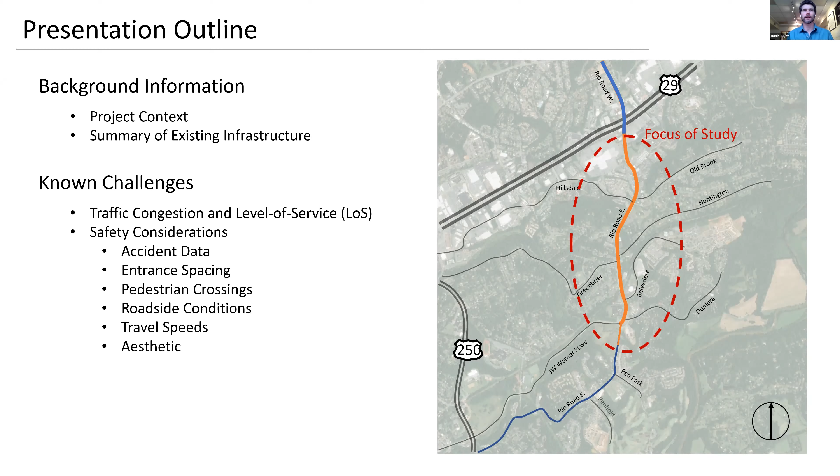So what we're going to do to start is work our way down the corridor, starting close to the Fashion Square Mall or Route 29, and back our way down as we get closer to Pen Park. We're going to look at some aerial photographs together and explain some simple observations we've been able to make as we work through the corridor.

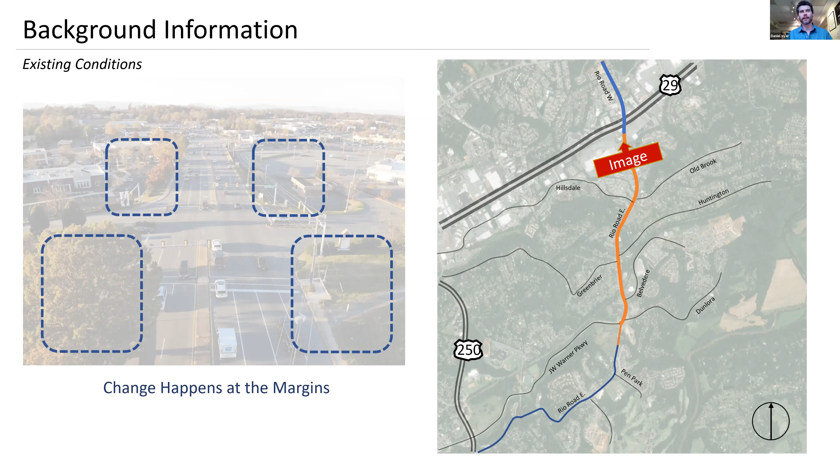As you listen and look at these photographs, I'd like to encourage you to pay attention to what's happening at the margins of the road, or next time you drive the corridor, to pay attention to what's happening at the margins. These are often our best cues for how the corridor should respond to the built environment, or for the built environment to be planned in a forward-looking way to be adjacent to the corridor in a healthy and responsible way for all users. Like all good social movements, change happens at the margins. So that's where we're going to start as we work down the corridor.

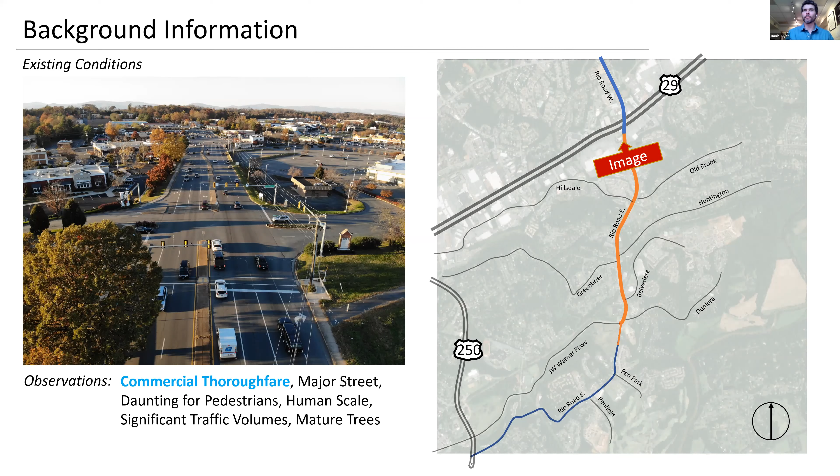Not surprisingly, here near the Fashion Square Mall and Albemarle Square Shopping Center, this is very much a commercial thoroughfare. It's a large street with a lot of throughput of vehicles. As a result, it's currently very daunting for pedestrians, largely lacking a human scale or a public realm for pedestrians to feel like they should be there. But there's also some mature landscaping and mature trees that are a great asset to the corridor, both from an environmental stewardship standpoint, but also just creating interest and visual barriers for vehicles to be aware of, like a constrained corridor. So there's good as well as challenging elements.

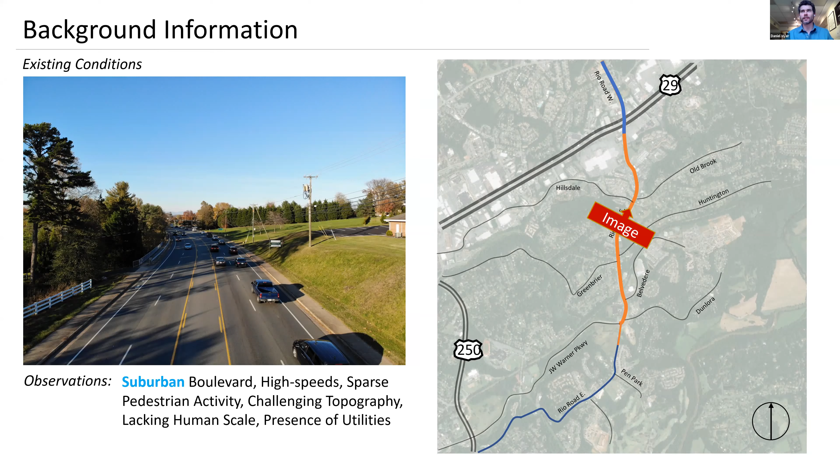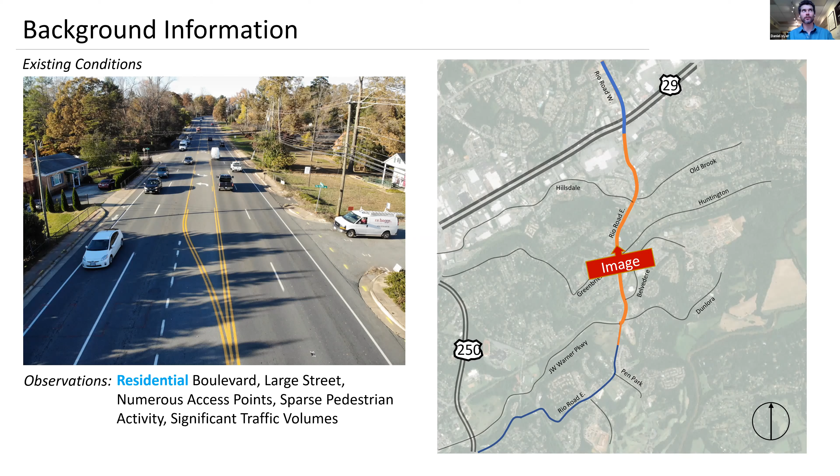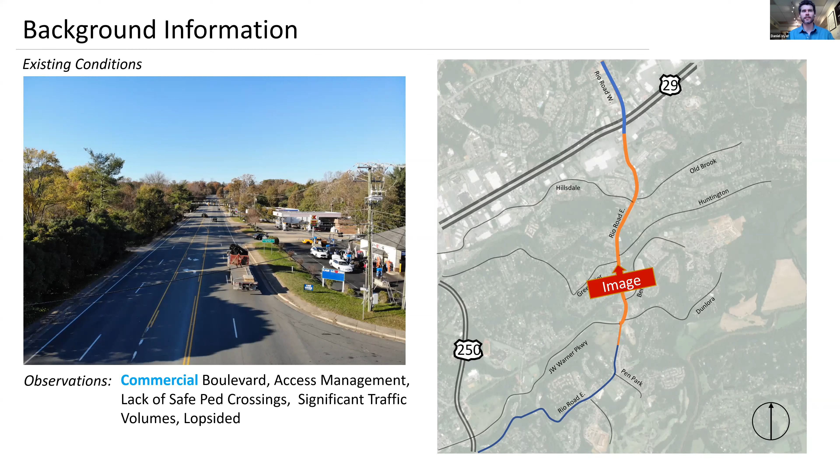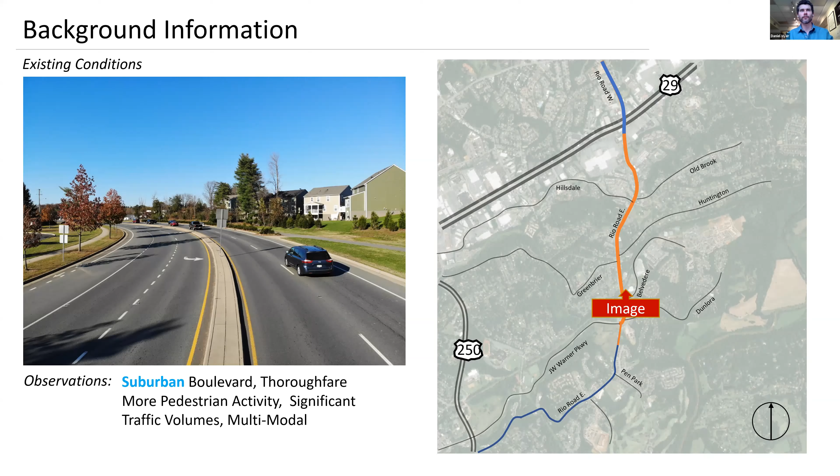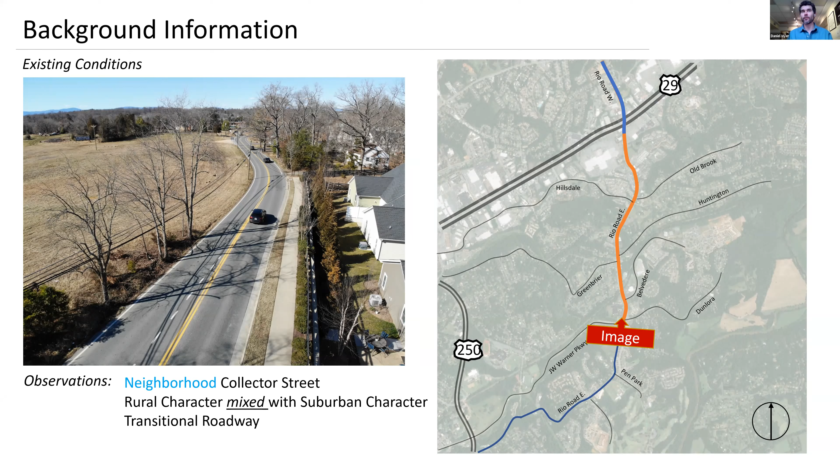It's transitioning itself from kind of a vintage or antiquated use to more of a modern use. And it's also a transitional corridor in that you're leaving the city and getting into the county. Here before long, you'll be on a 4-lane portion of Rio Road.

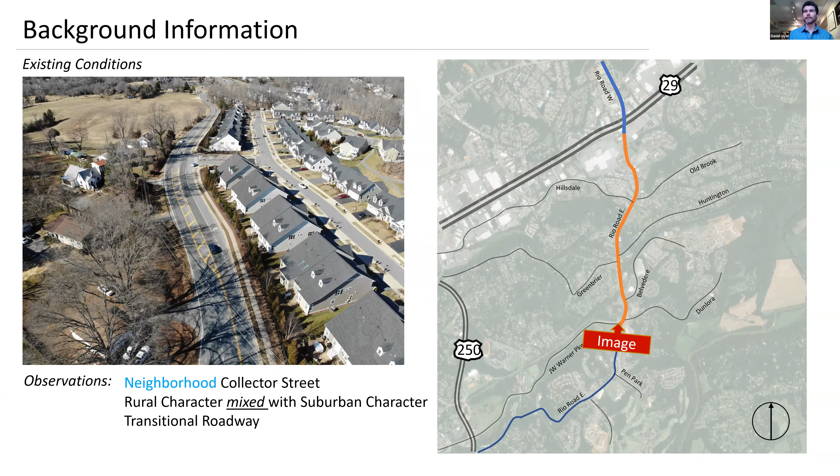And finally, our final existing conditions slide is more of the same. It kind of shows old on the left and new on the right, symbolizing this mixed corridor with different character traits. So we are both responding to what's on the current margins of the road, but also being aware of what is coming so that we can guide design and development decisions to keep this corridor cohesive.

You may or may not have known that this corridor is home to at least 13 transit stops. They're not easy to identify, even if you're walking along the corridor. This image on the left highlights a bus stop directly adjacent to Greenbrier Drive.

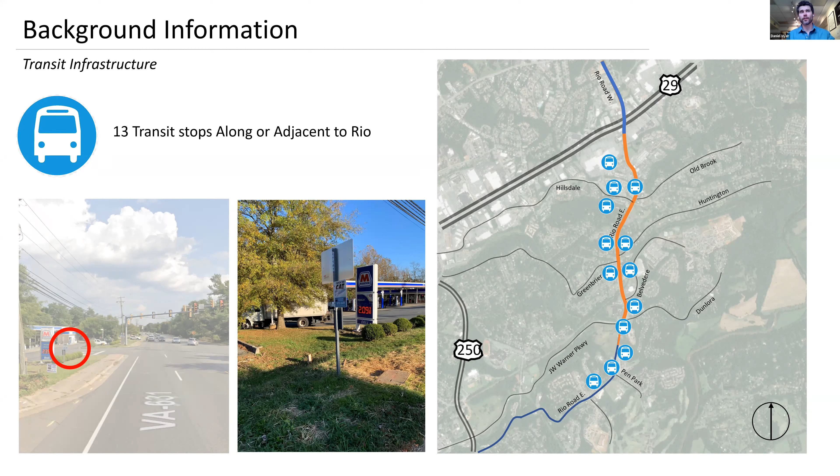I knew that a bus stop was there. I was trying to find the bus stop that was there, and I had a hard time finding it. That's kind of the nature of transit stops along this corridor. That's certainly something we want to be paying attention to, because it could be an interesting opportunity for creating traffic calming along the corridor, but also creating ridership growth for the transit service.

The corridor is home to numerous intersections of various size and complexity. There are 7 signalized intersections, meaning they have a signal with red, yellow, and green. There are also unsignalized intersections that pose different challenges, whether it's making a left-hand turn from Belvedere onto Rio, or trying to turn right into Huntington and almost getting rear-ended. So there's a number of different challenges depending on the context or typology of these intersections, and there are a number of them along the corridor.

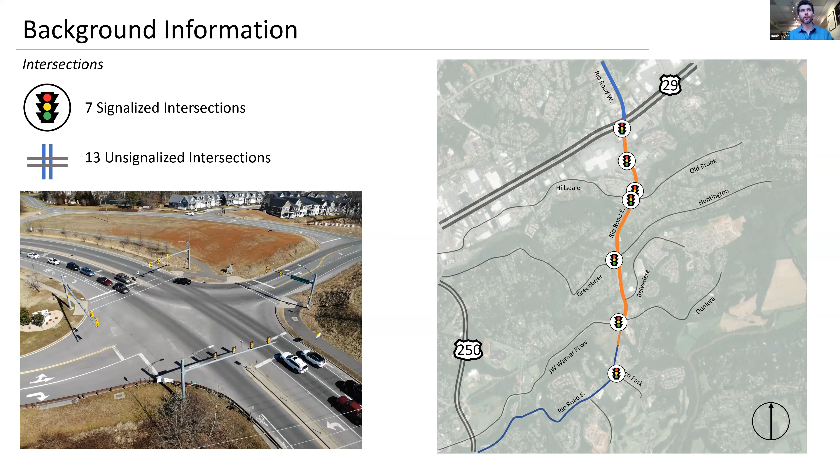The corridor does have bike provisions. That box is checked. Now, whether you feel safe in the bike lane or whether you actually want to use it might be a different story. But really, from John Warner Parkway all the way across 29, there is a dedicated bike lane.

But as you can see from the 2 images, based on how that bike lane is sandwiched in between the sidewalk and a gutter pan and narrow driving lanes, this bus is having a hard time making the turn and staying within its lane, encroaching into that bike lane. I have ridden my bike down this corridor, and it is a little nerve-wracking. It's definitely not for the faint of heart.

So even though those bike lanes are there, they might not be meeting the demand of folks who actually want to bike ride along the corridor, because it feels cramped and a little unsafe.

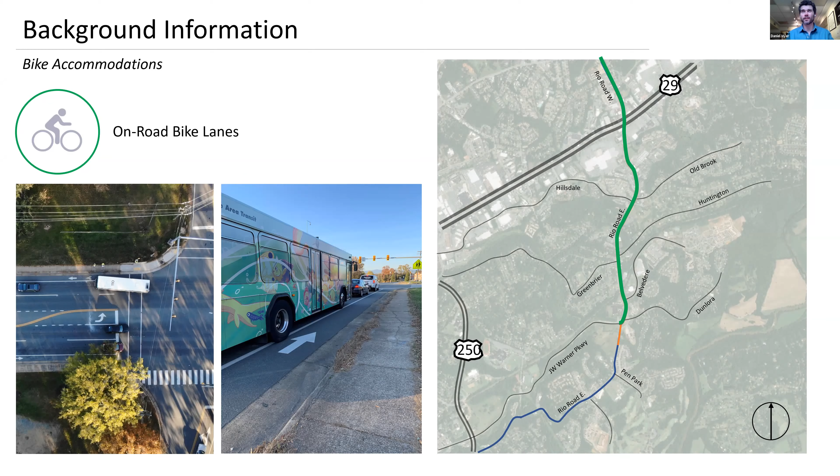Sidewalks. Again, there are sidewalks along most of the corridor. And again, you probably don't feel safe walking on them. Or if you did feel safe, you might get confused sometimes about where to go.

Here's an intersection in the photograph on the bottom left-hand side of your screen. If you were walking along the sidewalk and wanted to cross over to the gas station to get a sandwich, you might not exactly know how you're supposed to cross. It's not really predictable what a pedestrian might expect to see when looking to cross the roadway. I'm certainly not familiar with triangular crossing patterns, and it would leave me a little confused myself. So what you end up doing is jaywalking, and of course, that's always a good decision.

And if you are walking down the sidewalk pushing a stroller, well, you're going to hit some bumps in the road with vegetation growth and just a general lack of maintenance. So we're looking to make that a little more amenable for folks who actually do want to walk and feel safe.

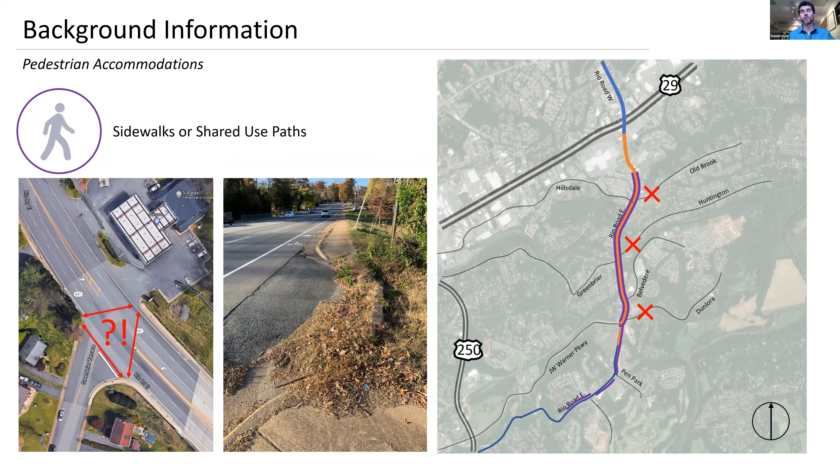It's worth stating that even if you did want to walk along the corridor, even getting to the corridor as a pedestrian could be challenging, because a number of the feeder streets coming into Rio Road don't have sidewalks either. So again, looking at those small and larger pictures here, we want to see people walking. We want them to have a place to walk to, and we want them to feel safe. But even getting them to the corridor should be considered.

A little bit of background information on why pedestrians may or may not feel safe, and what we can be thinking about as a design team going into this. Obviously, with travel speeds along the corridor being at least 35 to 40 miles an hour in most places, should there be an accident between a pedestrian and a vehicle, it would probably not leave the pedestrian in good shape, or alive, just based on statistics and speed data.

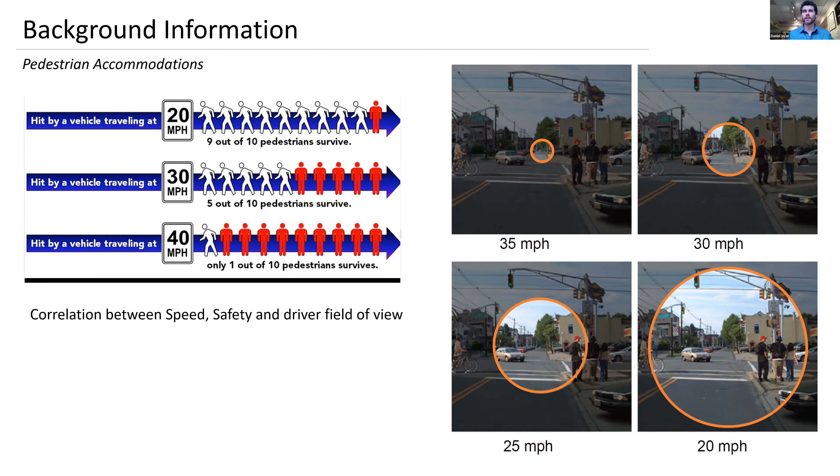So creating some space for pedestrians to be buffered or protected from drivers will be important. And also for drivers, you can't really blame them. The faster their cars are going, the smaller their field of vision is, because they're looking further down the road. That's what these images on the right-hand side of the screen try to indicate. As we're thinking through how drivers, pedestrians, and bicyclists interact, these are certainly things for us to be thinking through as we're proposing design solutions.

Most of you probably know, or are at least a little aware, about the number of studies that have happened in the vicinity of the project. And that's really why we are here talking about this right now. There's been the Rio 29 Small Area Plan, which had a traffic component, all the way down to studying roundabouts along Rio Road, and private development along the corridor.

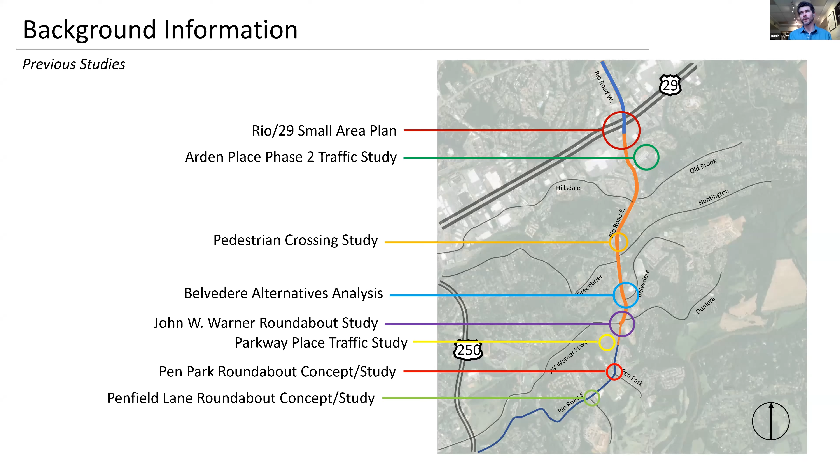There's been so many people who have looked at the traffic counts, the traffic volumes, and the turning movements along this corridor, but to date it has not been done in a cohesive and unified manner. And that's why we're here. We're here to evaluate all that has been done and bring the pieces together to create a corridor that responds accordingly to the numerous users, developments, and people passing through, looking at both current conditions and future conditions, and try to wrap it all into one cohesive and unified design understanding to guide future development and funding opportunities for projects the county might decide to proceed with.

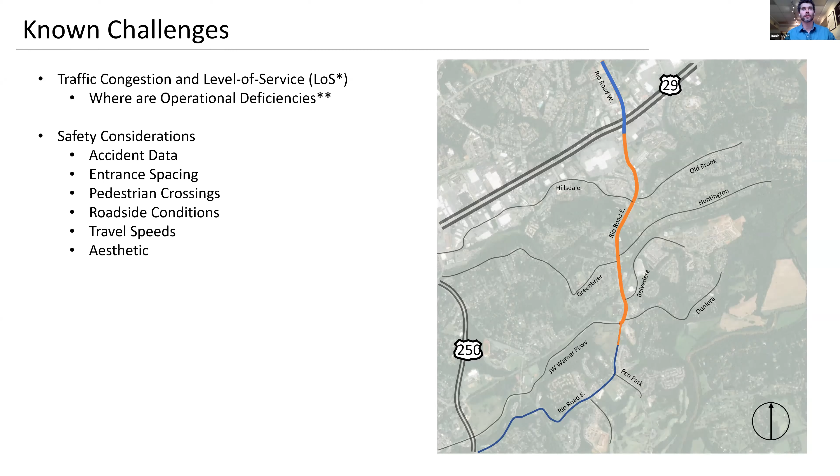So this will be good. Stepping back for just a moment to at least introduce a few definitions so that the rest of the talk makes a little more sense. What do we mean by level of service? This is sort of a common term in traffic engineering. And really what it is, it's a comparison of volume to capacity.

A roadway was designed to handle a certain capacity, or an intersection was, and what is the volume that it needs to carry? And so all of us have experienced the levels of service all the way from A to F. A good correlator is your blood pressure, or if you're having to explain to your children why you just used that word—that's more of a level of service thing.

And what do we mean by operational deficiencies? Operational deficiencies are some component of the corridor, or multiple components of the corridor, not operating in the way that they were intended. Or, in the case of this corridor, in many cases having to operate in a way they were not intended, which can also lead to an operational deficiency.

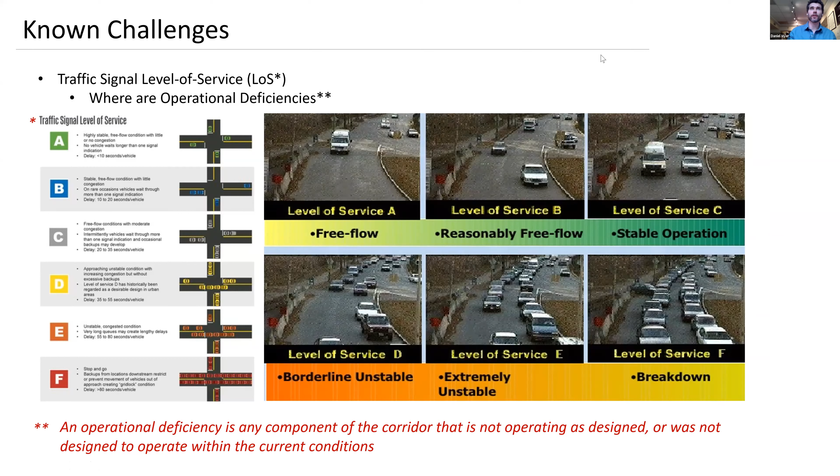So again, we're going to work our way down the corridor, top to bottom, north to south. Even though Rio Road is an east-west road, it's actually almost exactly north to south through this corridor. So if you're confused by that, we are going north to south on an east-west road. Weird. Starting at Old Brook, Hillsdale, Rio—this 8-way intersection, if you will—is a very unique condition. I'm referring to it as an 8-way intersection because I don't really know any other way to describe it.

They're so close together that they actually function as one intersection. And that closeness, that proximity of these two intersections being so near to one another, has contributed to so many of the problems that you're aware of. It's the crashes, it's the inadequate turn lane lengths and the backing up. It can lead to confusion of drivers—am I supposed to turn right now? Am I not supposed to turn right now? Or someone who goes through one intersection only to make a right-hand turn at the next intersection and gets rear-ended because they weren't expecting the car in front of them.

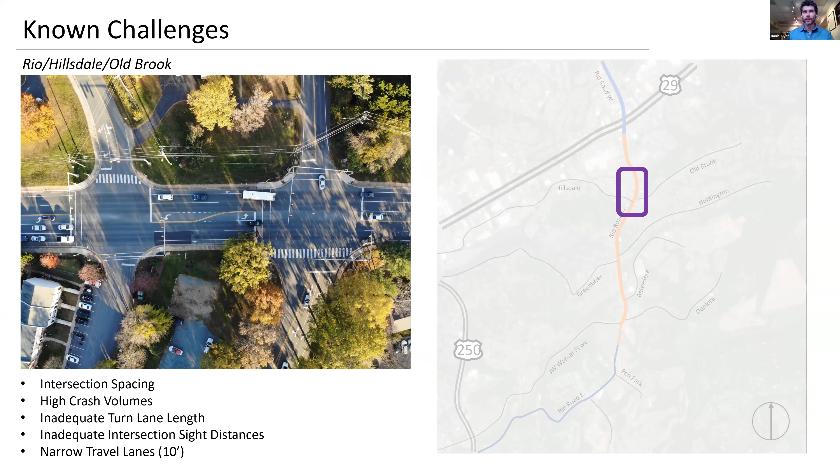It's kind of a little bit of a cluster, and a lot of that's just due to the intersections not being spaced properly, and we know that. The lanes are also very narrow—these are the narrowest lanes along the corridor, at about 10 feet wide. The sight distances aren't adequate. So this intersection is worthy of some focused attention as we consider the corridor as a whole.

This is almost inevitable, and it's sad because it is affecting people and their safety and their livelihoods. So this is something we're going to want to pay attention to, to increase the safety of the corridor. This is both an operational deficiency, because it's not operating properly, but it may have never been designed to operate more effectively, which is a lot of what we deal with when we're trying to retrofit antiquated infrastructure. I'd also like to note that as a pedestrian walking across all of those commercial frontage properties, that pedestrian is exposed, I think, to vehicle collision almost more than they're protected by being on a sidewalk. It's just a remarkably unsafe environment for cars and pedestrians.

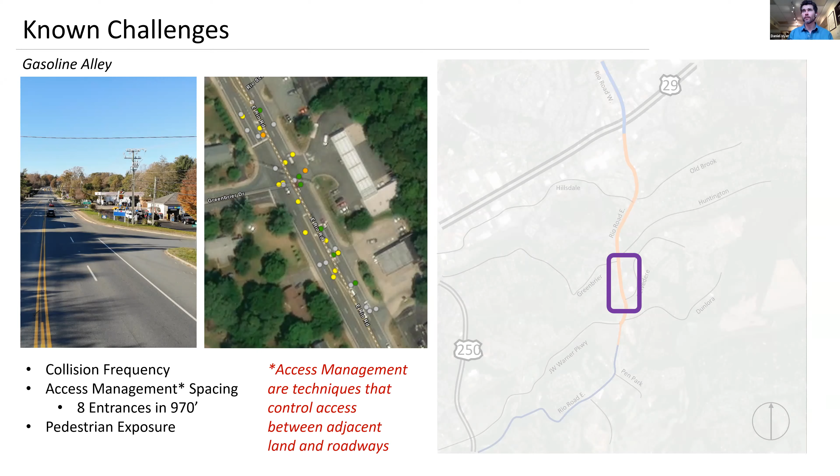So what do we mean when we talk about access management? That's something we'll talk about a fair bit through this process. Access management is simply a design control or technique we implement to guide access between an adjacent land use and a corridor. And that technique varies based on the type of road. Access management for 64 is different than for 29 or Rio. So it'll be responding in kind to the roadway.

Here at Belvedere, the intersection has some interesting challenges, mostly related to level of service. Believe it or not, analytical data have suggested that folks trying to make a left-hand turn from Belvedere onto Rio in the evening could be delayed as much as 8 minutes. Maybe one of you listening is one of those people, and if so, I'm sorry. That's a long time to wait, and I'd be utterly frustrated too. We want to improve that condition, and this is also a site of numerous crashes. So this intersection is not operating at its best, and it's not serving users at its best either.

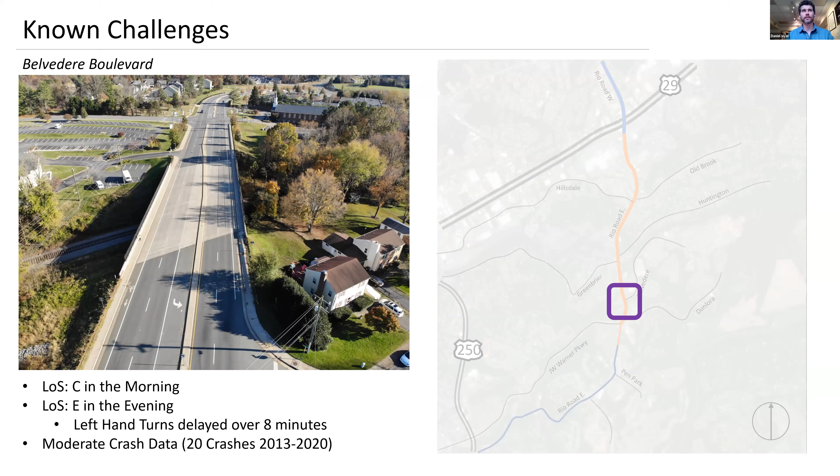So we're keying in on this intersection. John Warner Parkway is a very big intersection with a lot of traffic. In the morning and evening, it has a level of service on the lower end of the spectrum—remember, F is the worst, E second to worst. This intersection is beyond capacity and borderline unstable, resulting in very long queue lengths and high turning movements. The county is aware of this, and the intersection has been proposed to be retrofit with a roundabout, which I believe has been selected in the Smart Scale process to receive funding. That's why we're studying this—we want those improvements to integrate well with the plan of the corridor as a whole.

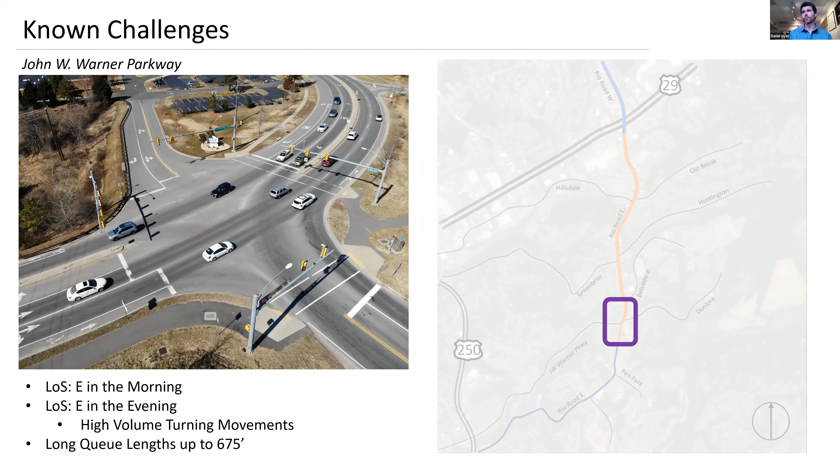I'm almost done. I'm going to leave you with a few things to think about as we close out.

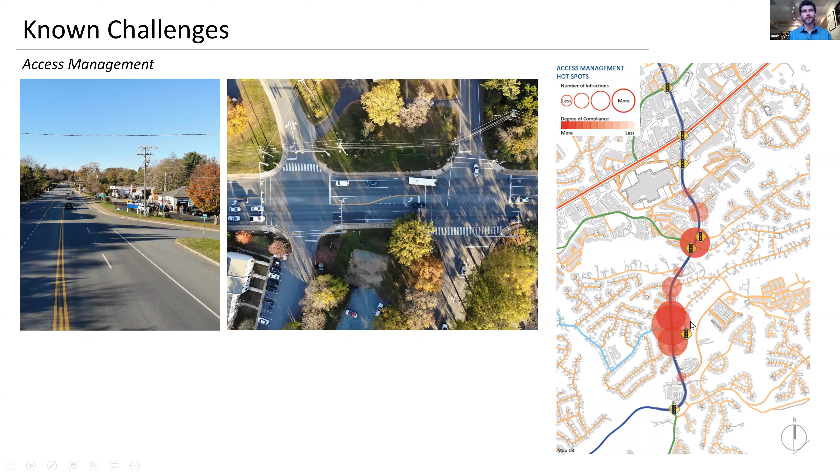When we talked about access management, we didn't just look at pictures—we ran some data points. What we've discovered is that if we overlay data on access management compliance on a graph with a relative scale, we see certain areas of the corridor that are not only very non-compliant, but the brighter the red circle, the greater the degree of non-compliance, and the larger the circle, the more of those conditions exist. You can see Gasoline Alley and Hillsdale are two areas of the roadway that are really not compliant and ready for some kind of improvement.

I'm also going to overlay accidents. Here's the accident overlay—again, the size of the circle represents more accidents, and the color represents the severity of those accidents. We're seeing more severe accidents down near Hillsdale, but a lot of accidents at John Warner and along Gasoline Alley as well.

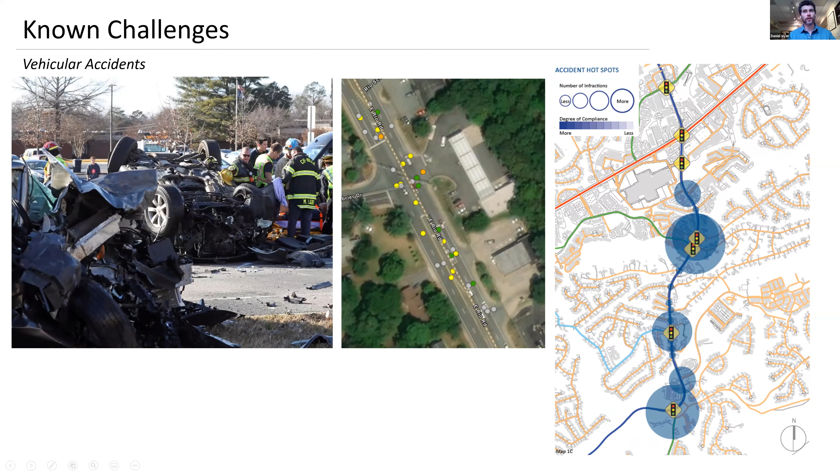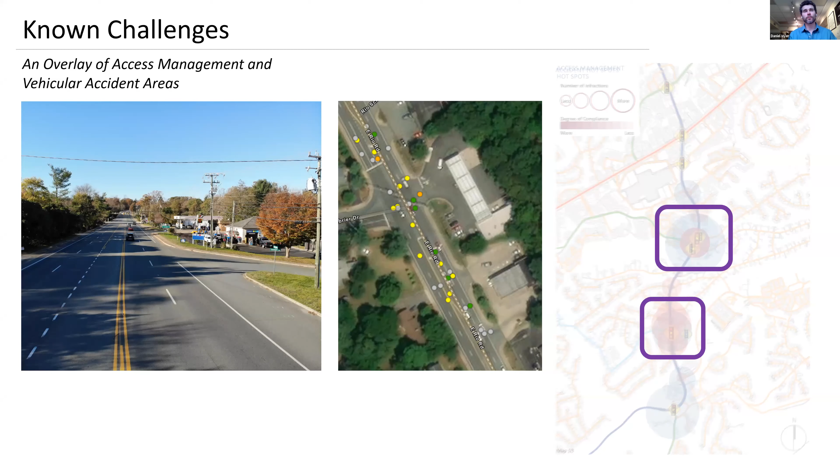What's really interesting is when you overlay the two maps—access management and accident areas—we're starting to see that several areas of the corridor are ripe for safety improvements. What we're hearing from your polling is that safety is an important consideration, and if so, these are two areas where our study should result in improvements that improve safety at those intersections. So we're not just looking at this with a touchy-feely glance at pictures, but trying to get data points around these items to move forward in a technical manner on how to improve them.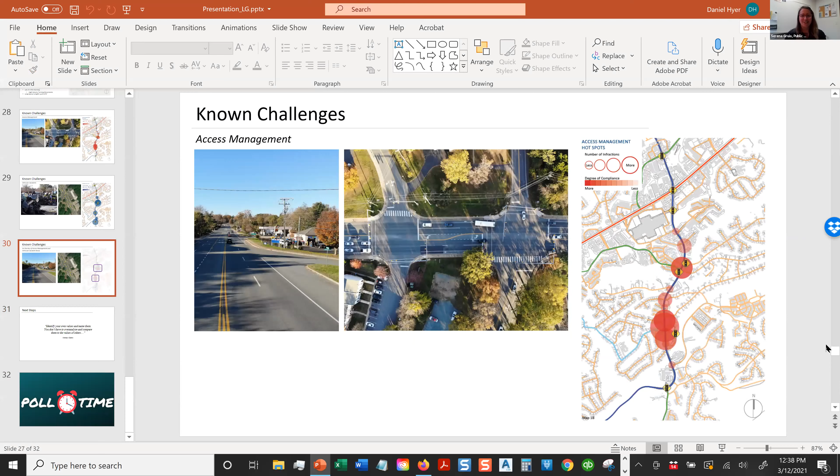Well, I think, oh wait, you're going to stop sharing here. I think we should all just take a breath. That was a lot of technical information, and I really appreciate the detail that you went into. I also wanted to share that this video is being recorded and will be available to view at your leisure next week. Just a reminder that this is a year-long process, and we're going to have a lot of time to learn together, share our experiences, and really dig into the content and make some choices together. So just sit with that for a second while I start to share my screen here.

Okay, so now I'm going to talk about ways that you can get involved with this process. Thank you, first of all, for being here today. You are already an observer. You are here and attending an educational program. Observers will also receive email updates. We'll share the project hub and the location where you can sign up for updates here in a minute. There's a variety of ways you can participate.

So if you want to kick it up a notch and become a contributor, you might participate in meetings, asking questions and sharing your experience. Again, that project hub is going to have questionnaires that you can contribute to and share comments on. If you can be an ambassador, if you're a part of a group or an organization, perhaps an HOA or a church that you think might benefit from hearing about what we're doing, or if you want to have some meaningful way to contribute, we'd hope you serve as a project ambassador.